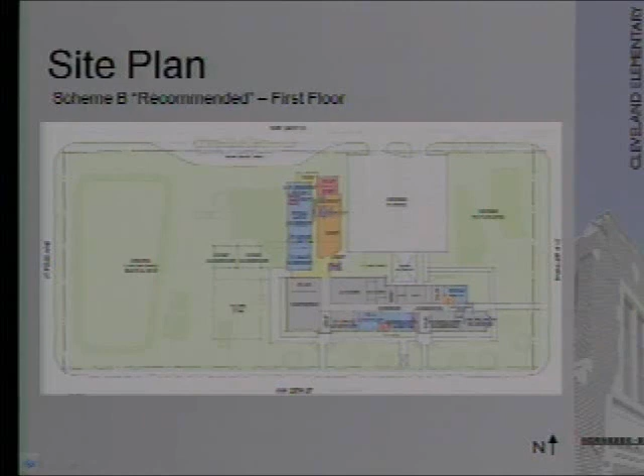Then on the second floor, this is kind of where we're changing, and we've got some demo on the second floor that wasn't anticipated. But the wing will line up, and we'll move the media center to where 3 classrooms were on the west side of the old school, and then provide new classrooms above that. I'm going through this very quickly.

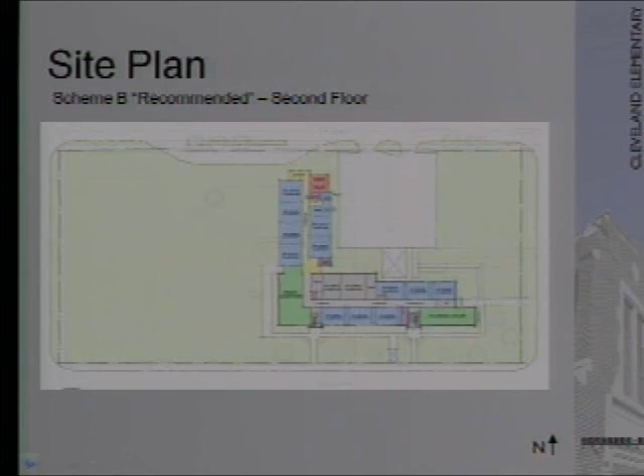With that said, the difference is about $31,000 over our budget, and Eric was gracious enough to tell you why that's the case. I'll be glad to answer any questions that you have.

This is our timeline. If you approve us, we hope to be through with construction and occupying sometime in November of 2011. Questions? Just 2 quick questions.

In your design or your presentation, you said it would accommodate 416 students. How many students will it go up to? Is it 425, 500? I believe that the 416 was what was required by the national consultant who did the original programming.

Okay, and reducing the amount of classrooms still meets the program design? Is that not reducing? We're providing everything that was in the program. We are providing everything for it. We are not reducing any classrooms. The difference is that we're proposing to move the media center differently than the original proposal, into where 3 classrooms were, and then we're going to build additional classrooms outside.

And then lastly, I know the facility is landlocked. Is there a way, are you going to put portable buildings there to move students during this construction schedule? Well, there are no portable buildings where we're going, and there are no portable buildings on this school at this time, and so we believe we'll be able to do this construction without having to. We think this is the best location for the additional wing.

The school will receive site upgrades, an accessible route from the school level to the track level. You couldn't go down the hill when I was at Burbank until first grade, and I remember the first recess at first grade, it was like freedom because you'd run out the door and run down the hill to the lower area. Right now the hill is still there, but there's not an accessible route, and they do have several kids in wheelchairs, so that's important to them.

There's some parking lot repairs and a landscaped area and facade for the reorientation I spoke about. The aerial photo shows the west side, and right now the parking lot goes literally to the building, and we're going to peel off some of that parking lot. This is the west side, and we're going to peel the parking back and create a landscaped area and put a new canopy to the west.

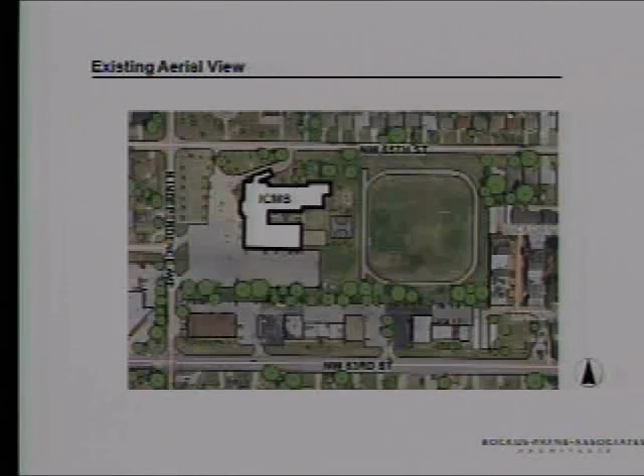The plan we're recommending involves the things we've talked about: the new administrative area, the gymnasium, media center, restrooms and locker rooms. The gymnasium will have its own entry, which will help for after-hours events at the gym. In addition, they use all 3 points of entry as carpool, so they have a very efficient carpool system, and this will help make it even better.

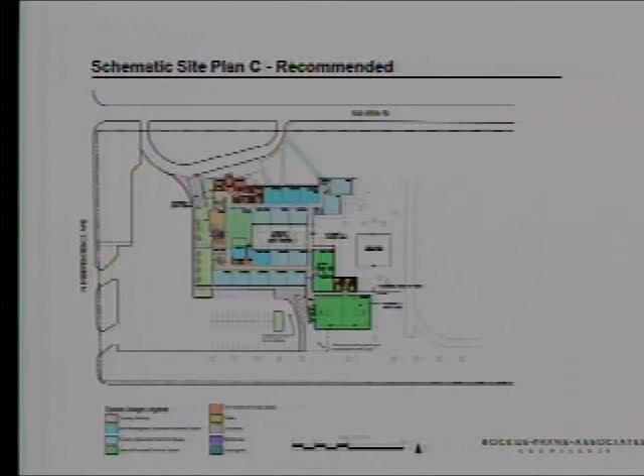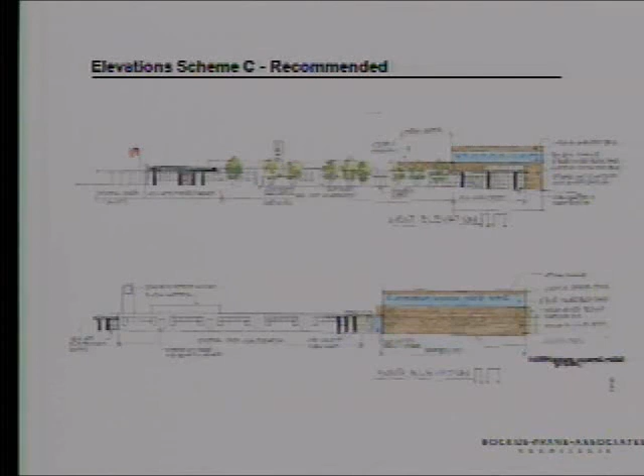It's a close-up showing the plan a little tighter. I did a quick sketch of what we're talking about on the west side, creating a new canopy here, and it'll be aesthetically very similar to the existing canopy, adding the gymnasium and entry at the gymnasium as well.

The construction budget right now, we're $2,000 under budget. I bet we can find a way to spend it because we've looked at 3 different alternates. One thing that's not listed as an alternate now but is very important to the school: right now the gymnasium cannot accommodate a big crowd. It has enough room to put folding chairs around the perimeter of the gym, but they really want to grow the gym 6 more feet so they can have 3 rows of bleacher seating in the gymnasium so they can host events and have more parents sitting there.

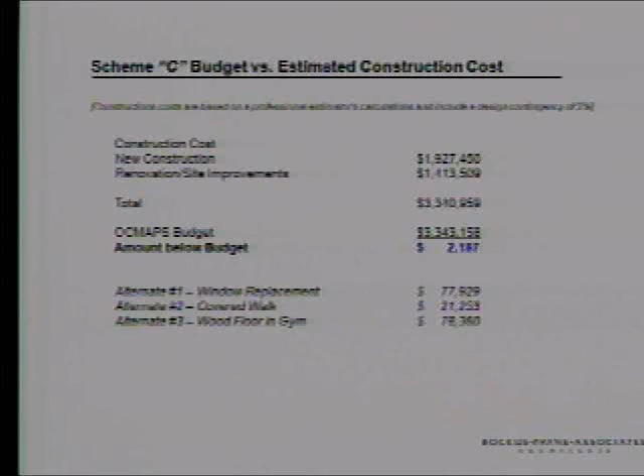So we're going to look at that very closely in the next phase to see if we can afford that. The school has talked about raising funds to put in the wood floor and trading that out with the extra 6 feet, so we're kind of in negotiations. The design has not been completed.

Our timeline, assuming approval, we'll move on to preliminary design, which will be finished in August, and hopefully the construction will be done in June of 12 and ready for school in the fall of 12. Any questions or comments that you might have?

Ready? Anthony? You mentioned, or at least the report mentions, the redesign of the cafeteria such that there'll be storage off of the cafeteria, which will move the line off. And I'm not visualizing that. My son goes to the school, so I'm familiar with it, but I'm not visualizing how that'll work.

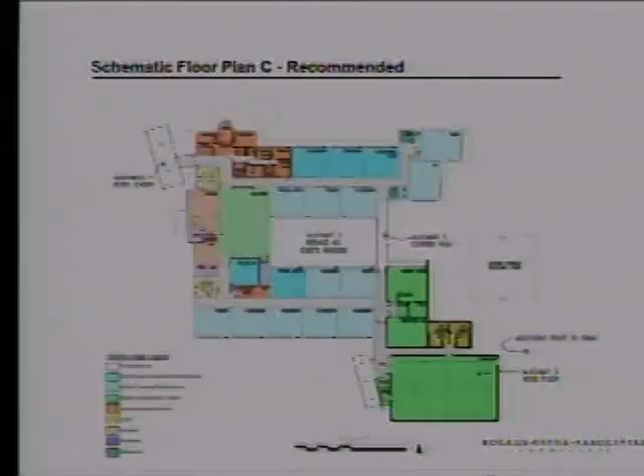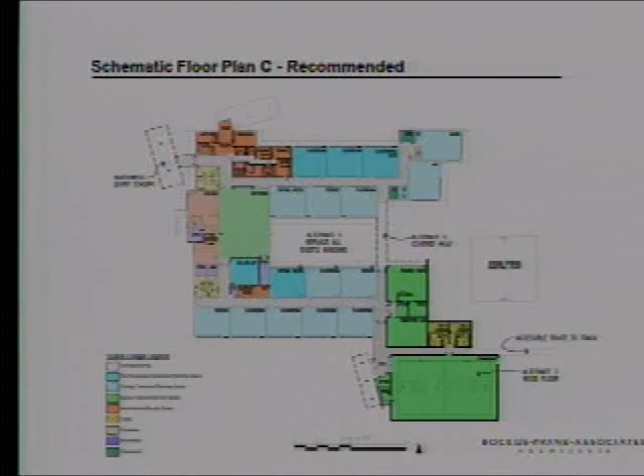Right now, the food line sits right out in the cafeteria area, or multi-purpose room, and we are creating - this is the old boiler room right here - and we are going to abate the boiler, the asbestos or hazardous materials in the boiler room, and turn that into the food line so we can take the existing equipment that they have and reconfigure it in here, so kids will come in the line here, loop back, and come out there.

Good. The $2,000 I might suggest be used for hurdles. My son is a hurdler, and they right now use chairs as hurdles. Yeah. Moving right along.

Take that under advisement. Are there any other questions? The windows - is that replacement windows, the alternative? Right now, the windows are original from the 50s. They're single pane, aluminum frame. They aren't thermally broken. They're as energy inefficient as you could possibly have.

That's an alternative we need to use. If we can afford it, if the bidding climate when we bid it out is favorable and it's very competitive, then we think we'll have an opportunity to use some of the alternates. But our current budget says it's not under the budget, so we have to look at it as an alternate. Okay, well, I hope the windows get in.

Other questions? I'd recognize a motion for approval. So moved, Mr. Chairman. Been moved, and there's a second. All in favor, please say aye. Aye. Opposed, by like sign. Thank you. Thank you, Bruce.

Next item is to approve the preliminary report for Belle Isle Middle School, Project ES-48. Thank you, Mr. Chairman. This project is also slightly over the budget by $38,000. The primary factor in this overage is to help make a more identifiable entry for this school. It's been one of our important features that we've added to make sure that visitors coming to the school know exactly where to go. We do have Renaissance architects here to make that presentation and answer questions that you may have.

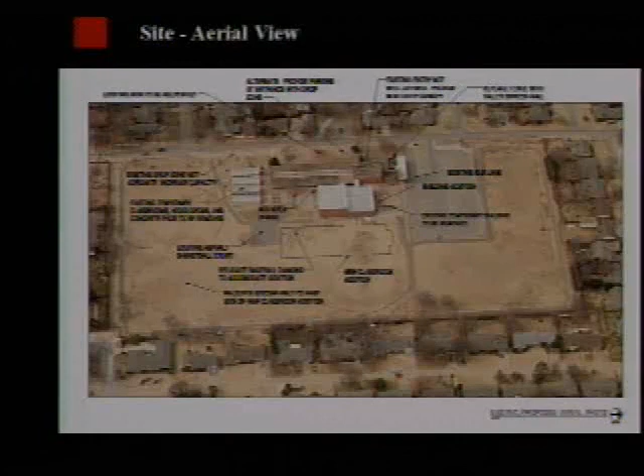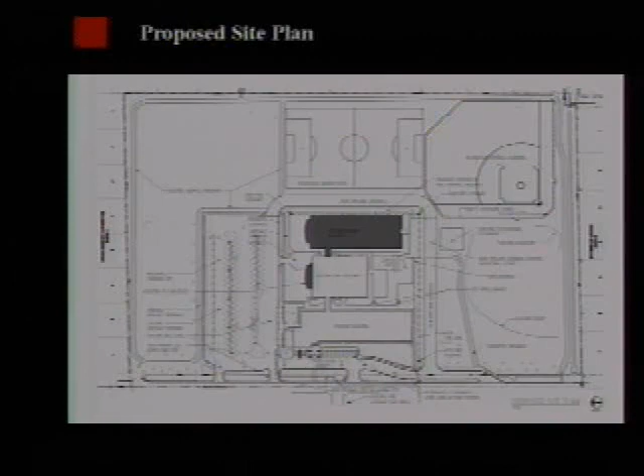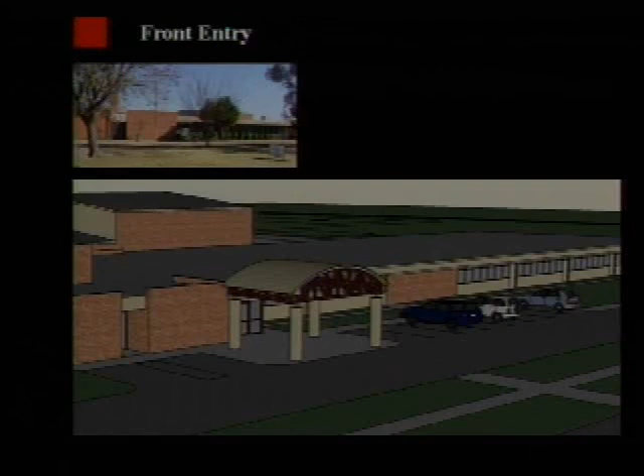The proposed site plan shows the darkly hatched areas: one at the top is the new classroom addition, and to the left-hand side on the central portion is the storage areas for the media, arts, and so forth room. At the top of the slide is the existing entrance. The bottom portion is the proposed perspective enhancing the new entry and loading area.

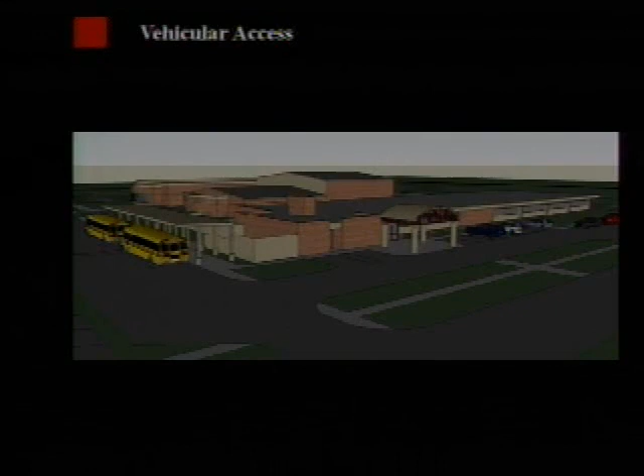This is the next slide, the vehicular access, so that we'll be improving the loading both for the students in the parking areas as well as the front entry.

The interior improvements are the security vestibule being added, new kitchen equipment with a new serving line, replacing ceilings, new carpeting and flooring, providing new storage, new ADA hardware, new accessible restrooms, upgrading the fire alarm, drinking fountains, painting the interior, new and exterior doors, new marker and tack boards, emergency lighting, energy efficient lighting including wireless clock systems, upgrading the electrical outlets, repairing and adding new HVAC equipment, replacing the existing windows with new thermally broken glazing, and new control access to the building along with security systems and video surveillance.

The floor plan at the top portion shows the new classroom addition for the 7th and 8th grades. That wing, plus the portion to the left on the central plan, is again the storage and so forth. The bottom part of the floor plan is the existing building that has been revised for the new classrooms for the 6th grade wing, along with a new admin area, and showing the new expansion of the cafeteria.

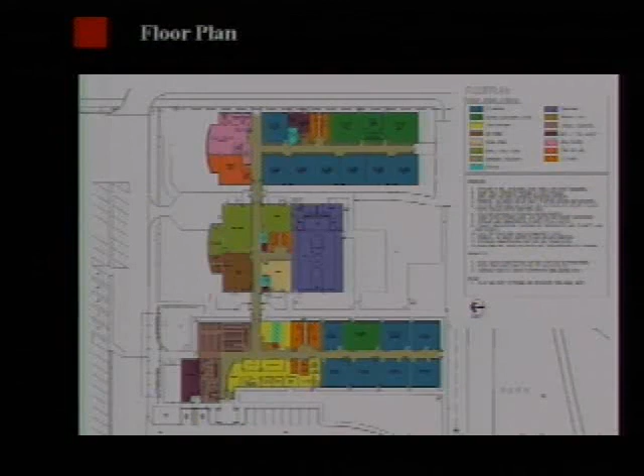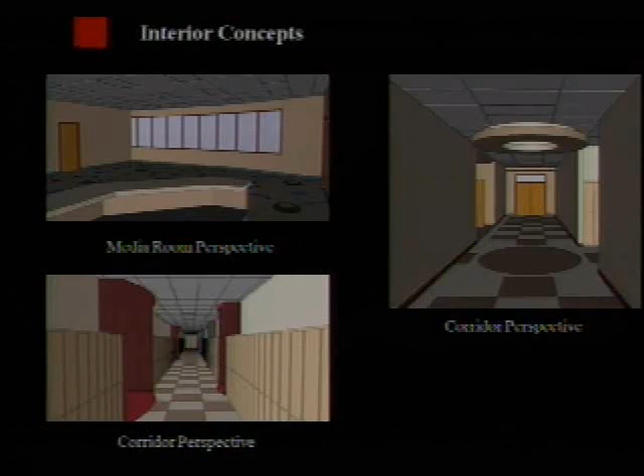These are some interior concept perspectives of the cafeteria and conference areas, media areas, corridors, and the construction cost analysis. As Eric was mentioning, we have a difference of $38,715.

Project schedule: we are now beginning, or will be beginning, the construction document phase. That will be wrapped up in August, a bidding contract award towards the later portion of November, and construction starting towards the end of November and wrapping up December of 2011.

The construction phasing: the classroom addition will start first, towards the end of November of this year, wrapping up by the 1st of July. The existing classroom renovation, cafeteria administration, fire lane, west parking lot, new storage, relocation of the soccer field and baseball diamonds will occur in June of 2011, wrapped up by the 1st of August, and the portable building removal will be the tail end of the project towards the end of December 2011.

Are there any questions? Good, go ahead. I do have a question, but I think it's more for Mr. Winger.

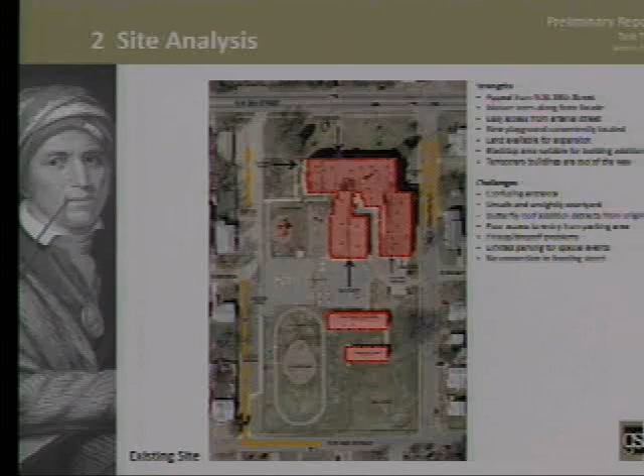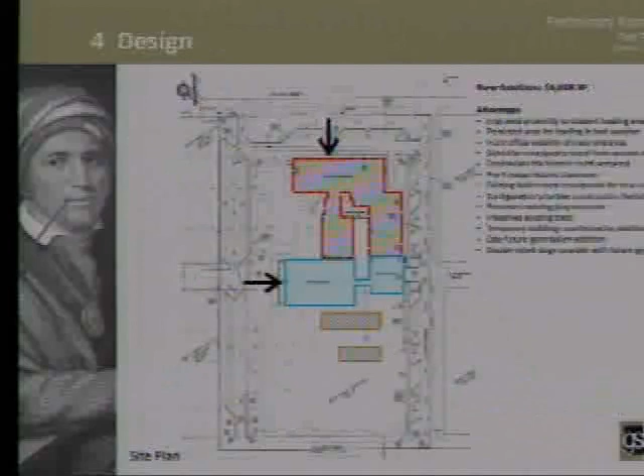We've also got two alternates: the north entry drive and visitor parking, which I mentioned, trying to reestablish the front of the school on the north side of the building. We've designed a drop-off entry drive and handicap and visitor parking in front of the building, which will add to convenience and wayfinding. We've also incorporated the possibility for some new on-street parking, which will remove some parallel parking situations, without adding a new parking lot that might be empty a lot of the time, to address special evenings and before and after school times.

You can see the proposed new entrance on the north, where the historic entrance was, and the secondary entrance from the loading area on our new addition. The new addition is there in blue-green. The temporary buildings are outside the footprint of the project, so we'll be able to take advantage of that capacity while we build, which works well for phasing.

You can see the north entry drive, which will allow you to pull in, park easily, and walk directly into the administrative suite, solving a lot of the problems they're dealing with on site.

The building itself has an addition to the south, first and kindergarten classrooms. We're also taking a kind of unattractive and dangerous gap between the buildings and enclosing it, repaving it, and planting trees as an open-air courtyard. There will be a secure area where they could have picnic tables or utilize the space for play areas for some of their special needs kids or smaller children.

We're also adding a cafeteria with a stage, and one of the things we did working with the staff—since they're a performing arts school and a year-round school—was account for their unique program requirements. They have a bond-funded gym coming, not as part of this project, but coming soon.

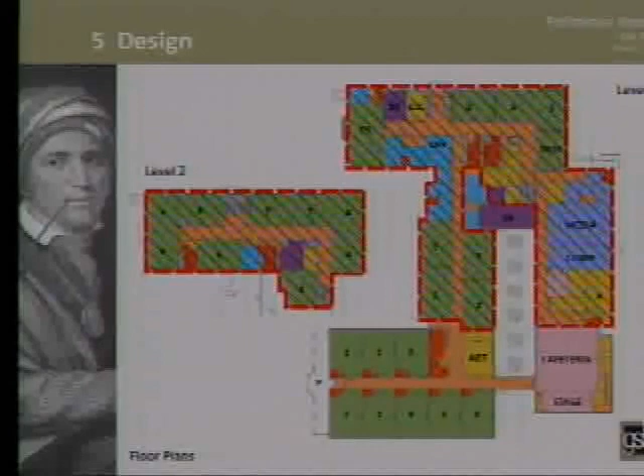We've allocated space on the site to attach that gym just below the word stage you see there. This stage is configured so we can open up the back of the stage to the gym, giving them a two-sided stage that functions both with their cafeteria and with their new gymnasium. So some of those provisions have been incorporated into the design.

As I mentioned, the historic character is really important to both the staff and the patrons. So the addition will pick up some of the architectural details of the original building, the same brick and cast stone details, simplified to make it affordable, but still very much in keeping with the original building, not attempting to attract attention or compete with that beautiful old building.

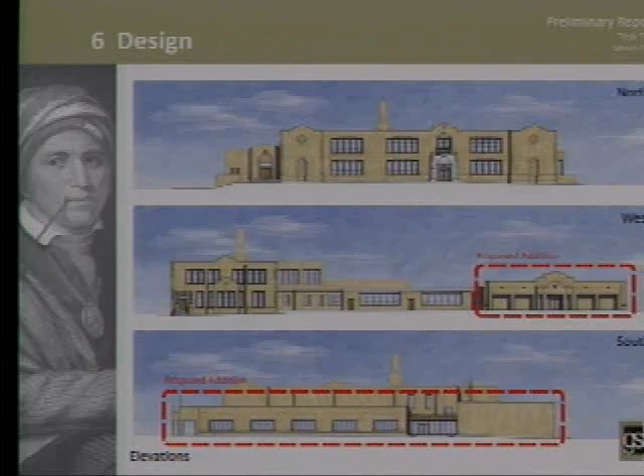The other nice thing we're doing is there's a butterfly roofed addition that was added to the building in the 40s, which is actually where you enter the new building, and we're capping that with our addition. So the old modernist wing, which was kind of at odds with the 1920s era building, that roof will no longer be seen from the south end where you see the butterfly shape. It actually ties the whole design together.

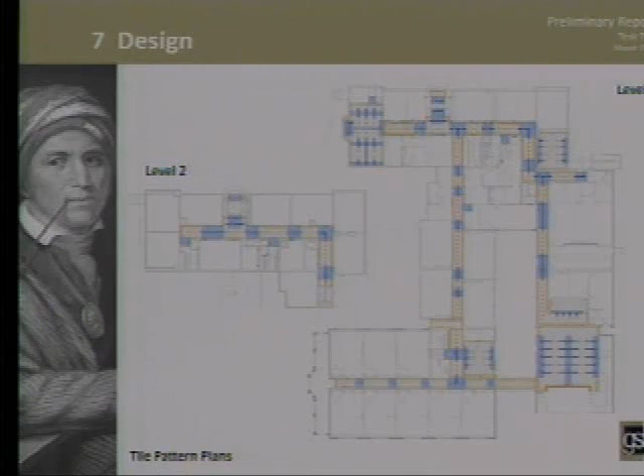This is just a tile pattern plan showing how we're incorporating the color palette into patterns within the public areas and corridors. We worked with the staff and the principal to develop a color palette that works with the beautiful gold glazed tile that runs throughout the school, and blue, their school colors.

We're ahead of schedule right now. We're actually moving forward and can be done with our final plans as early as the end of May. This is as aggressive a schedule as we could anticipate. It may extend a few months, but we're still well ahead of schedule in terms of delivering the project. We're anticipating approximately a 15-month construction schedule. This will be complicated by the fact that this is a year-round school, so there will be some unique provisions that will have to be taken into account when the contractor comes on board.

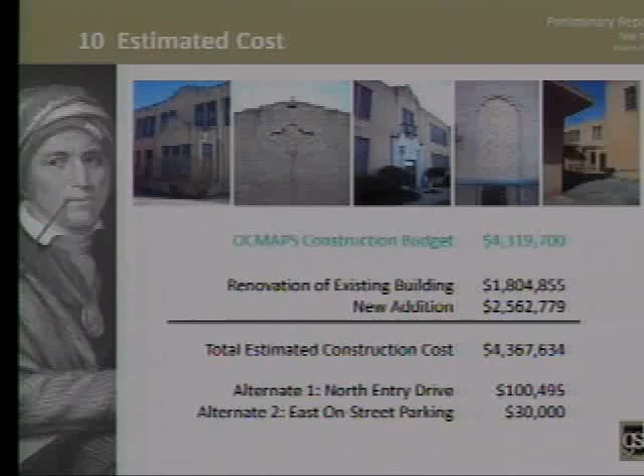This is our budget and our estimated construction cost at this point. You can see it's about $45,000 above the MAPS budget at this point, for reasons that were mentioned earlier. We've also got two alternates that we're trying to incorporate in the project, so as we move forward in construction documents, we're looking for any opportunities to incorporate savings that will allow us to get all these elements into the project within your budget. We certainly hold your budget in the highest regard and want to give you the best possible project with the money that you have available.

I welcome your questions if there's anything I didn't touch on that you'd like to know more about.

Carl? Yes, I've got a question about, you're going to add the parking lot to the north side facing Northwest 36th. Do you anticipate any traffic issues, given that Northwest 36th is... We absolutely cannot queue up onto 36th. Presently, the loading occurs on the southwest corner of the site. So we'll have basically a gate arm installed, and during before and after school loading, the access from 36th will be closed off. You'll still circulate in a clockwise motion around the site, but during other times of day, that gate will be open and people can pull in, pick their kids up and leave, or visitors can arrive. So we'll control access in that way.

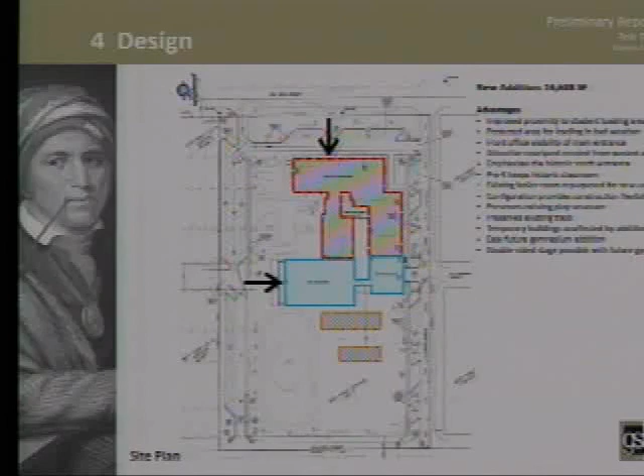Okay. Other questions? Seeing none, I'd recognize a motion for approval. I move to approve. It's been moved, it's been seconded. All in favor, please say aye. Aye. Opposed by like sign. Thank you. Thank you very much.

Next item: recommend the Board of Education of Independent School District Number 89 approve the preliminary report for Northeast Academy for Health Sciences and Engineering.

Thank you, Mr. Chairman. We do have LWPB Architecture here to make this presentation and answer questions you may have. One of the items you'll note in your packet is that this project is considerably over budget by over $200,000, and I'll allow them to answer those questions you may have regarding that. Thanks.

For accessibility requirements, we're going to be putting in chairlifts and restoring elevators and different things like that throughout the building. This building is going to be totally remodeled. There's no addition on this one.

We'll be complying with the district standards. We're going to provide one central science lab instead of trying to reestablish every single lab, but we're going to have one science lab that all the science classes can use. We're going to upgrade the kitchen and upgrade systems within the building.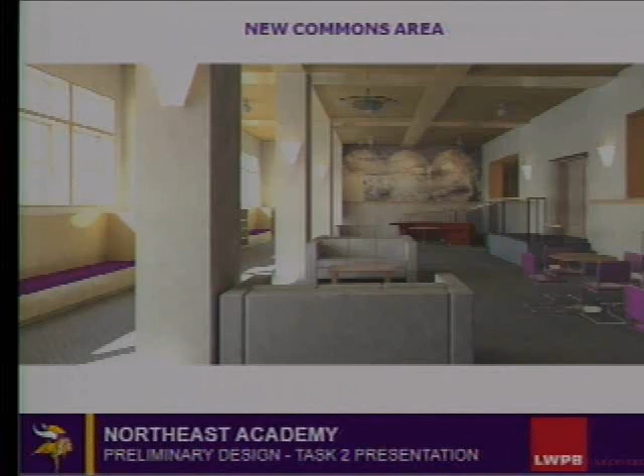This is the existing commons area, and this is a rendering of what we're proposing for the commons area. That back wall would become the history wall for Northeast. We did these renderings before we did our colors, so we've got a little more spunk in some of these than what's showing up in these renderings.

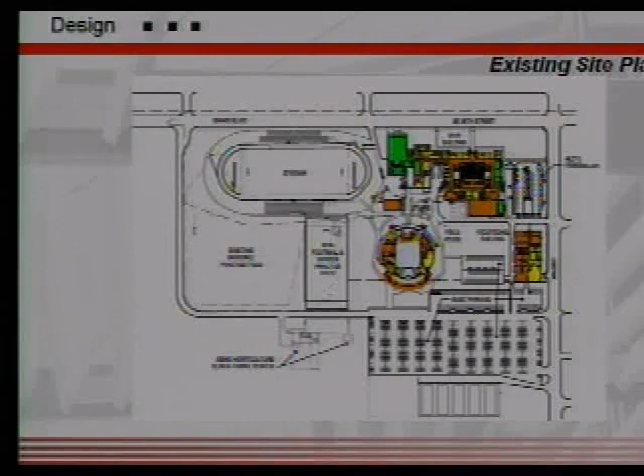To the southeast is the vocational building that will be renovated. To the southwest, the field house that will be renovated. Just west of the field house, a new football and soccer practice field. And then north of that, the stadium will have some upgrades related to it.

The legend here is broken into different levels of renovation. The blue is our only addition, which is our two fire stairs at the dead-end corridors. That's the only addition we have. The yellow areas are extensive remodel, where you're basically gutting the area. Green is major remodel, and brown is minor remodel. These colors are consistent throughout the presentation.

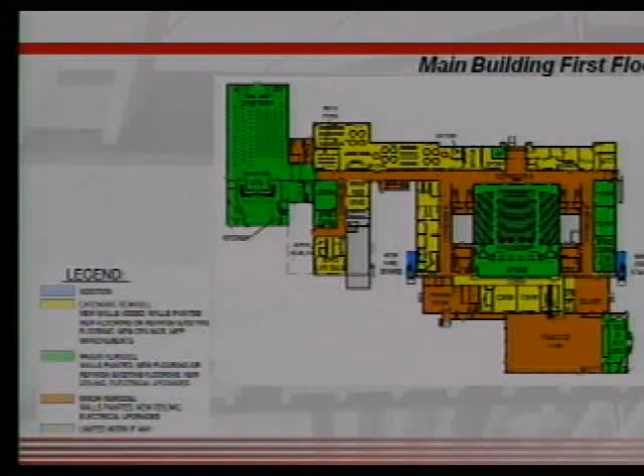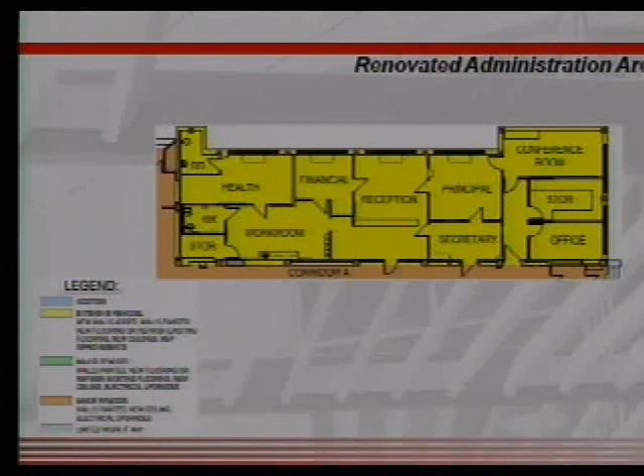This is a blow-up of the renovated administration area, new administration in the same location, but changing everything within it. Media Center is a different story, being gutted and more than doubling in size. It's just not big enough for this size of a high school. Essentially in the same location, but again, more than doubling in size.

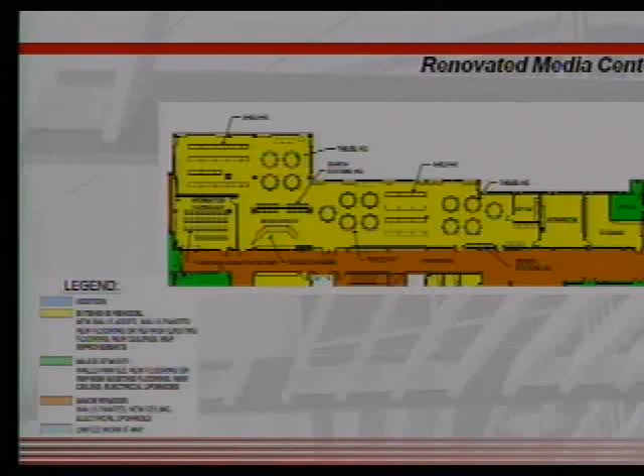Student services area, we're moving them from different areas around the building into this single location for easy access for students and for parents.

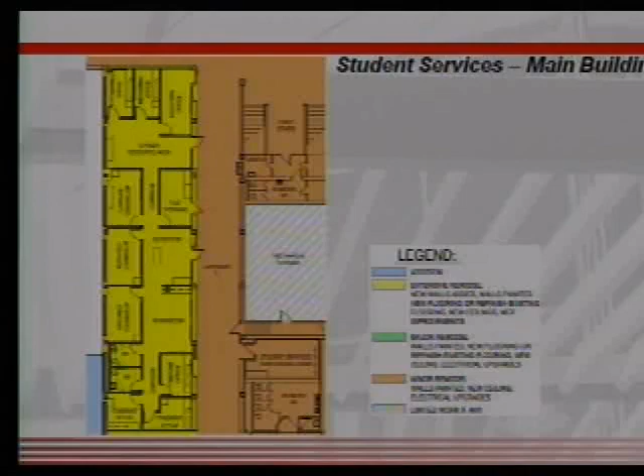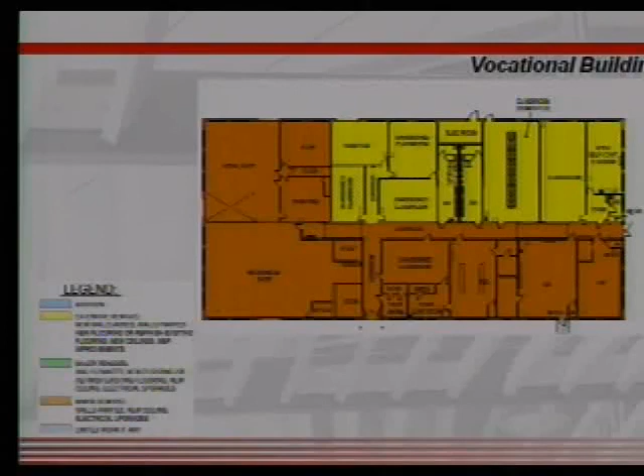In the vocational building, a little bit different story, where about half to three-quarters of the building is minor remodel, and the area in yellow is extensive remodel, where we're upgrading restrooms. Overall, we're getting a net gain of 4 classrooms for the entire school building, which everyone is pleased with.

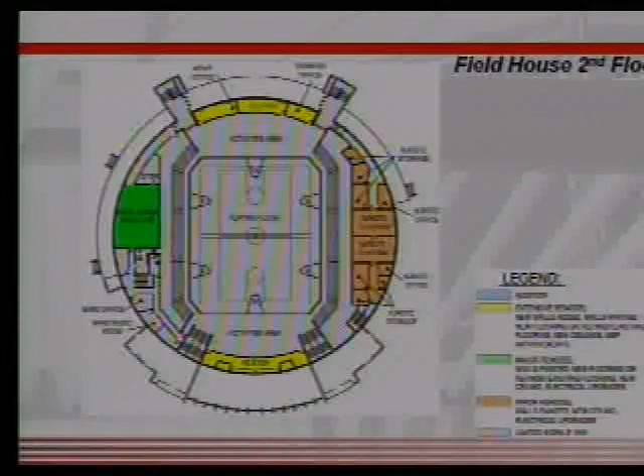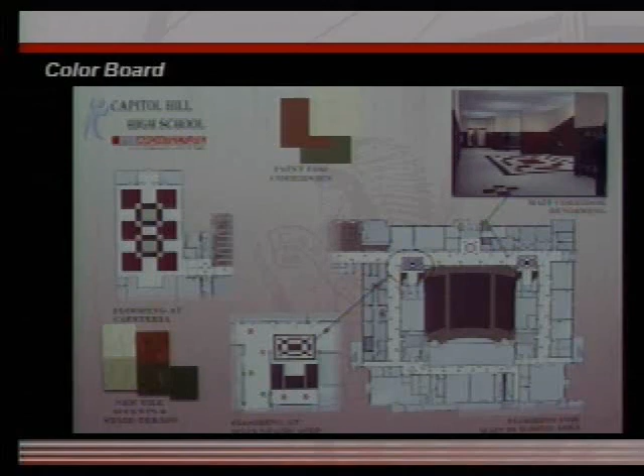Schedule: we are at final plans and specifications, asking for approval for that today, going out to bid and receiving bids next month. Construction starting in July of this year and being complete two years later in August of 2012, in time for school.

Any questions? Carla asks: Can you tell me if there were any requests or needs made by the community or school district staff that you weren't able to meet?

Yes, a lot. Specifically, they wanted to make sure that they weren't losing classroom space, and wanted to make sure that every area was being renovated.

Trying to think, were there any others that the community had? Parking lot, that's true—that was a big one. That was really the main reason for it. The safety and getting in there after hours, that was a big item.